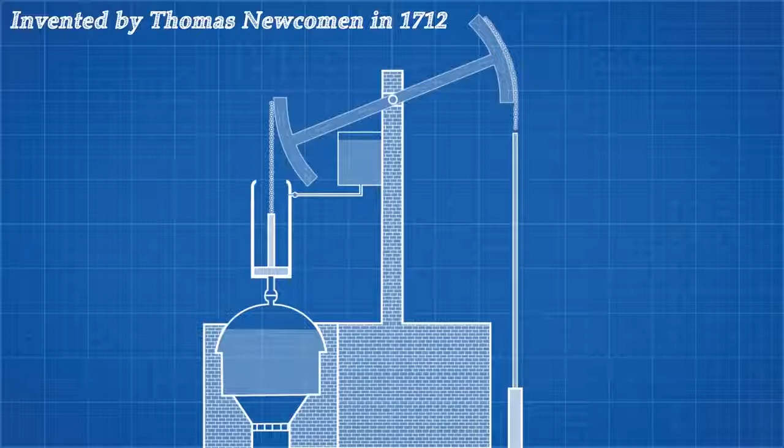This is one of the first practical steam engines, and it was used to pump water. The engine was incredibly inefficient. This machine was not going to start any industrial revolution, but it found a niche in coal mining, where its fuel was cheap and readily available.

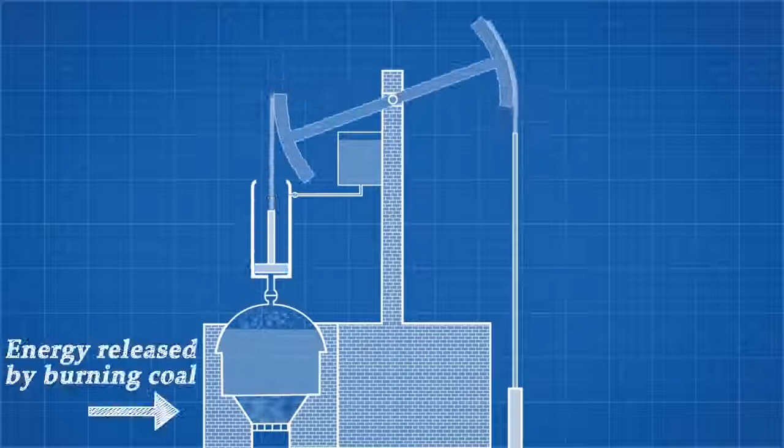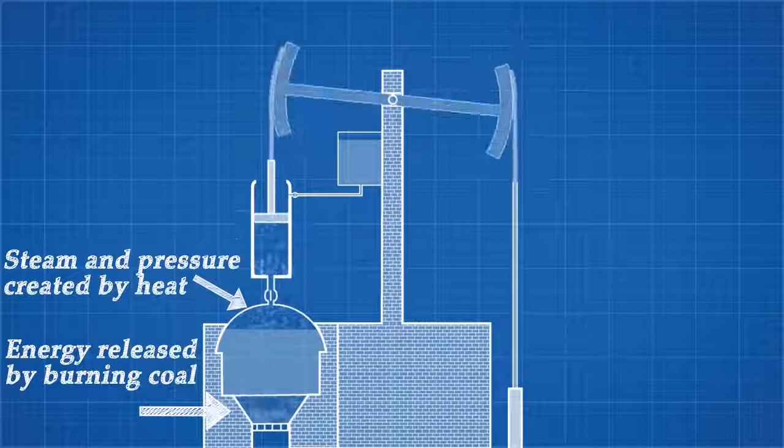To investigate why this engine was so inefficient, let's first talk about how it works. The engine takes energy stored in coal and converts it to heat. That heat is used to form steam, which expands into a piston cylinder, causing the pressure to increase and forcing the piston to rise against atmospheric pressure. No mechanical work occurs on this stroke because this chain can only transmit force in tension.

The power stroke occurs when cold water is sprayed into the cylinder. This lowers the temperature, causing the pressure to drop. Atmospheric pressure now pushes the piston back down.

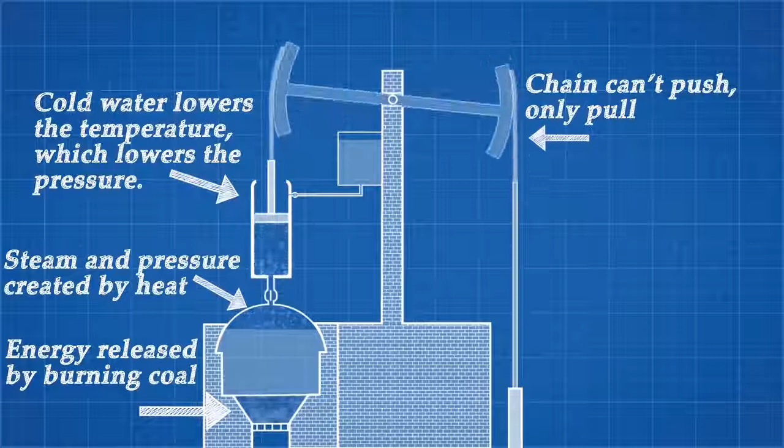We want to be able to quantify how much work is being done per cycle of this engine. To do that, we plot the pressure and volume inside the piston cylinder for one cycle, like this. The area inside is the work done, but this is the idealized PV diagram.

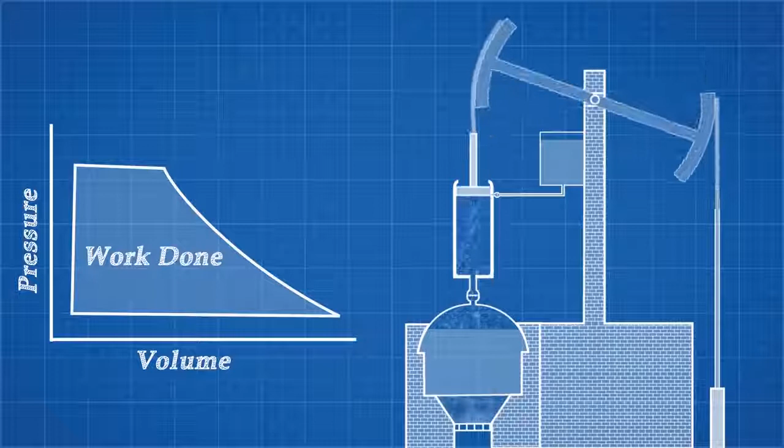In practice, there is a lot more energy being wasted. We lose a big chunk here because the steam is prevented from expanding to its full volume. A lot of energy is lost to the environment too. This is clearly visible with thermal imaging. The effect is made worse by cooling the entire cylinder with cold water.

So an immediate improvement is to make a separate condenser. Here the steam can be cooled without cooling the entire cylinder. There are a lot more inefficiencies involved that reduce the total work done. Many of them are unavoidable, but we can improve the situation by upgrading the piston cylinder.

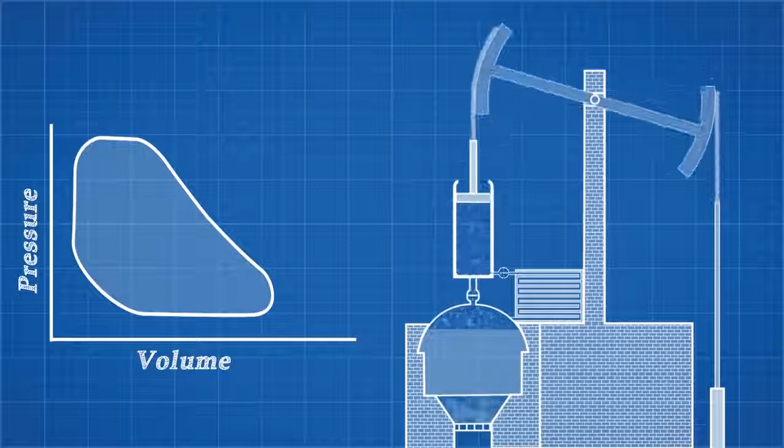We are starting to see a steam engine capable of sparking an industrial revolution. But this reciprocating motion isn't much use for most applications, especially with this flexible chain connecting them. What we need is rotational motion, which requires a different setup.

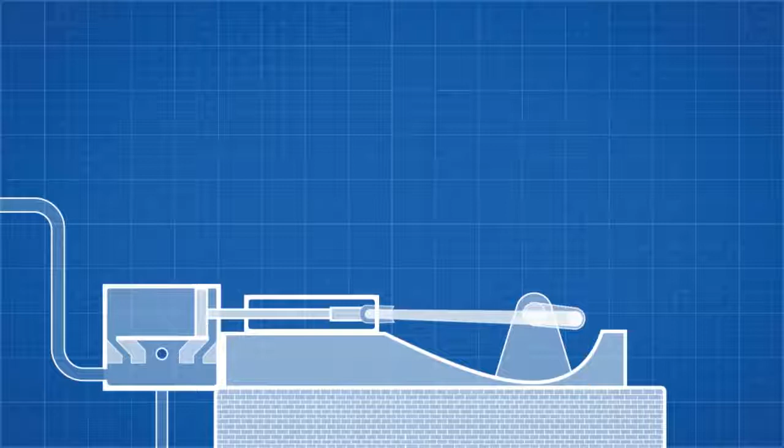To convert this linear motion to rotational motion, we need a crankshaft and connecting rod. We have turned this piston cylinder on its side, so atmospheric pressure can no longer force the piston back down, so we need to use steam on the return stroke. This requires a control valve to control when the steam enters and leaves each side of the cylinder. The valve is controlled by a cam.

The steam engine is now working on both strokes of the engine, improving its efficiency and power, but piston engines like this do not produce constant torque. They'll pulsate in speed and torque during a single cycle, like this. This can cause vibrations and jerky movement.

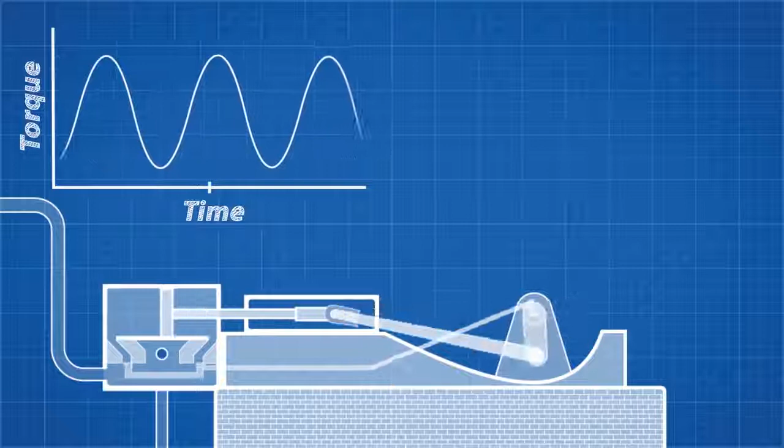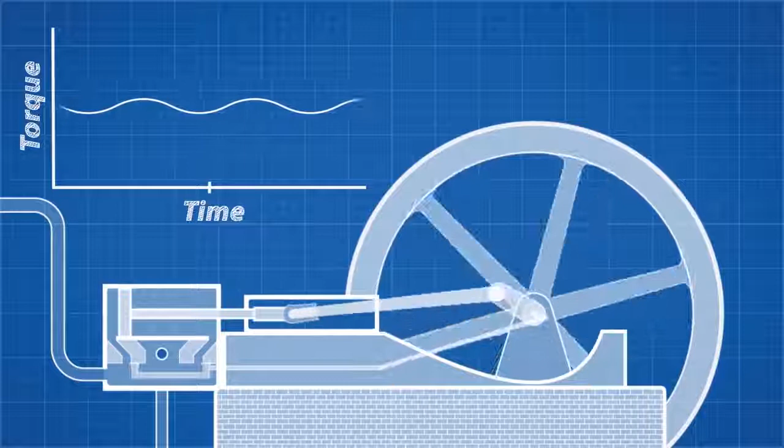We can reduce this with the use of a flywheel, which stores rotational energy with inertia and evens the torque out. It's essentially a mechanical battery. David Robert demonstrates this beautifully with the V8 solenoid engine of his own creation. Here you can see the engine will continue to rotate without additional power, but the engine comes to a dead stop without a flywheel attached.

The development of steam engines taught us a lot about thermal and mechanical efficiencies, and you may think that steam engines have become obsolete, but nearly all of our large power stations still use steam technology to convert heat energy, whether that be from coal, nuclear or solar, to mechanical energy. The technology has simply evolved into an even more efficient form, with steam turbines.

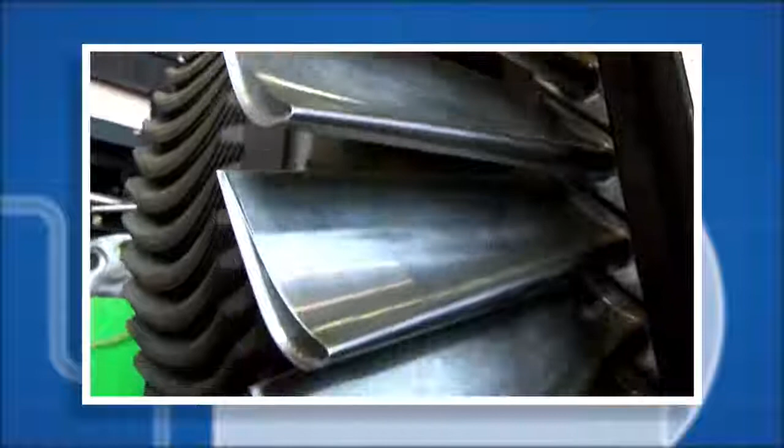Thanks for watching. I have one last device I want to include in the development of steam engines, which is one of the most iconic inventions of the Industrial Revolution, the centrifugal governor. I'm already hearing the angry screams in the comment section about me using the word centrifugal, so I'm going to talk about this device in a completely separate video to discuss the differences between centripetal and centrifugal force. If you'd like to see that, don't forget to subscribe.